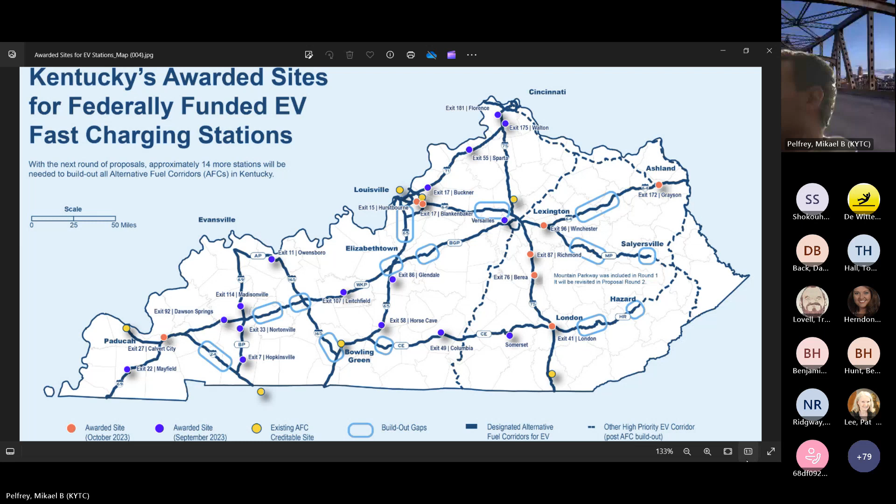That is all I've got this morning. I can't figure out how to stop sharing my screen, but I will turn it back over to Stephen.

Thank you. Yeah, let me know when you figure out Teams. It's only been 3-4 years. I know, but I'm on 2 different devices. Okay.

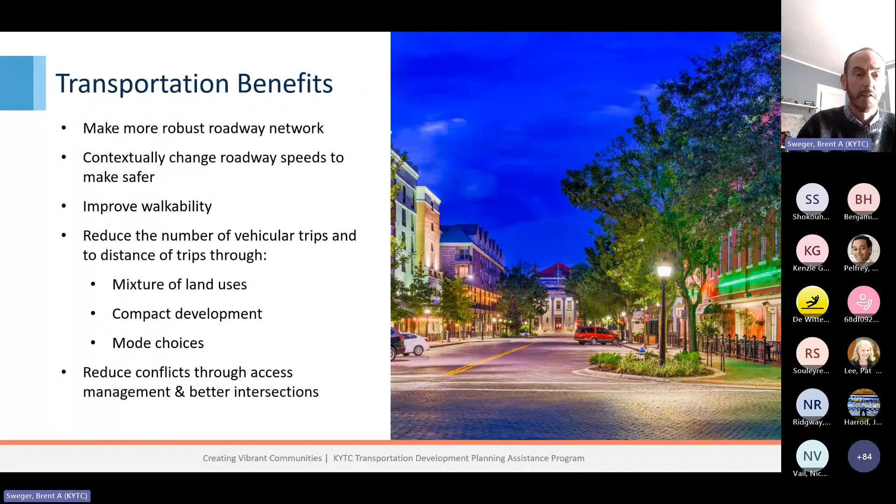Back in October at our STP meeting, that was the week we opened up the application process. I let you all know about the program, and many of you got the word out to your local communities across your area, so I want to thank all of you that did that, those at the district offices, area development districts, and MPOs. We also tried to get the word out broadly through the League of Cities, the Kentucky Main Street program, as well as the APA chapter of Kentucky.

The application process was open for about 2 months, closed on December 11th. Once we closed it, we got the application information sent out to our selection committee. We had 7 people that served on the selection committee, and they spent several weeks reading those applications, evaluating them, and scoring them using metrics to establish those scores.

We went over last time what those measurements were, but it comes down to 70% being about whether it's really meeting the goals we've outlined, and we had a lot more detail in the criteria on our website. Then there's how ready is the project and how ready is the community — is this a one-person show, or are there a lot of people on board and supportive of this effort?

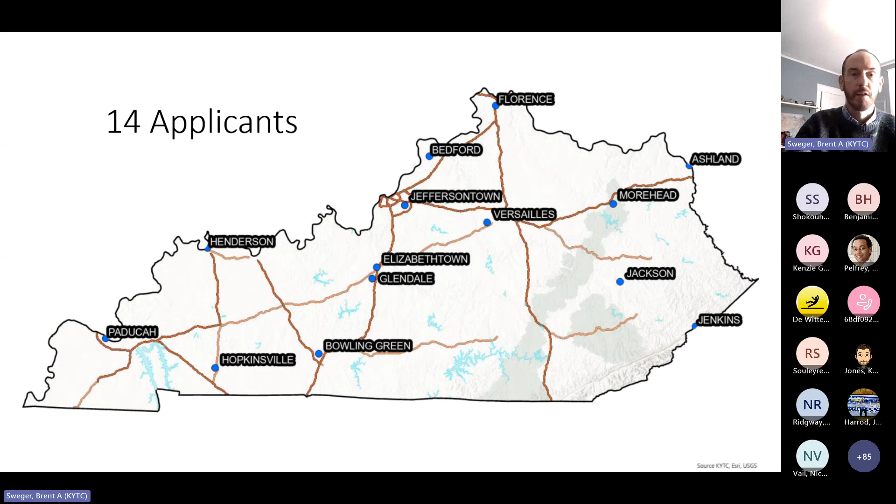But in the end, we were excited to come up with 4 recipients for this time. So let me share those with you right now. The communities are Morehead, Glendale, Elizabethtown, and Jeffersontown.

I'm not going to dive into too much on their specific applications this time. I'm hoping that at a future STP meeting, Nathan, if you're interested in getting more topics, maybe in the summertime we'll be able to share the details of each one of these. But we're excited to get working with each one right away.

For those communities that didn't make it this time around, we're going to send something official to each of them. As part of that, we're going to offer an opportunity to have a debriefing, so if any of them would like to hear about the feedback from the selection committee, both positive or anything that could be improved, we'd be happy to do that.

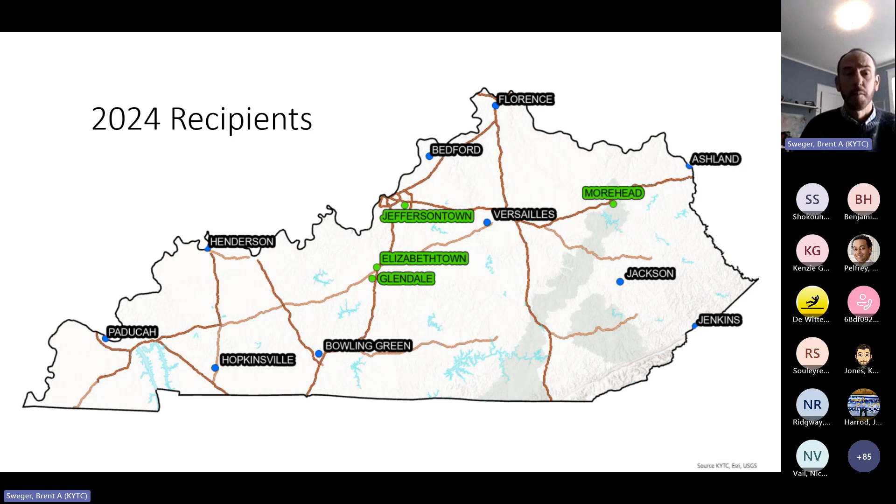So the next steps here, we're actually meeting next week with each of the recipients. We're going to have a scoping meeting to talk about their project a little bit and get into forming that scope for our consultants' work.

The schedule starts in February, we'll have a kickoff, and we're going to be creating an engagement plan for the community. Like all of our planning studies, public involvement and defining the appropriate level of public involvement is a critical piece. So we'll be doing that and looking at the base conditions, what's out there right now in terms of the roadway networks, the existing land uses, et cetera.

Then in the springtime, we'll be doing some visioning exercises and setting some goals and strategies with each of the cities. In late spring and summertime, we'll be getting into the details and forming what some of these concepts are and getting some feedback on that.

Then we're looking to basically wrap it up in the early fall, where we'll create a draft plan, possibly get some feedback on that, and then create that final plan. Then working with each of the cities to adopt them, getting the city or the county to adopt it, as well as planning commissions, and then talking to them about how they can actually move these initiatives forward towards reality.

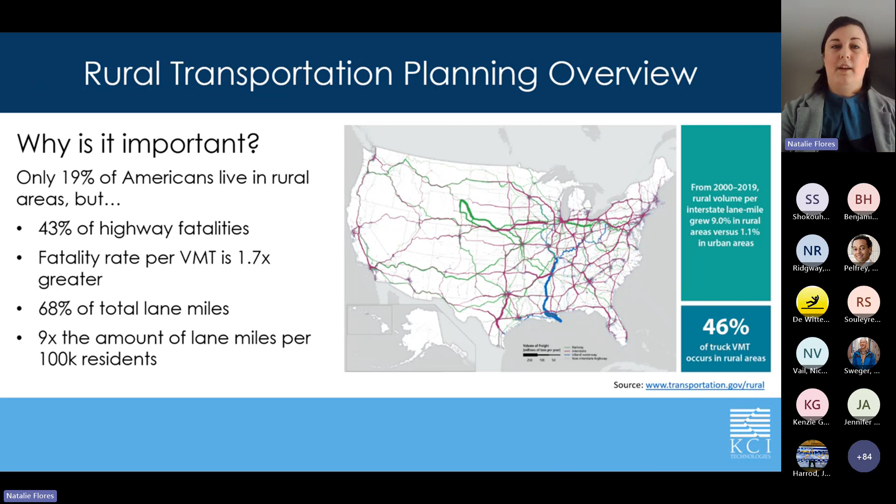Going into our first example, we're going to talk about the Perry County Bicycle and Pedestrian Plan. Perry County is a very small population-wise county in Tennessee, the second lowest in population with about 8,000 residents. It's located along the Tennessee River in Middle Tennessee, but it has a unique set of natural and cultural resources.

In addition, I just mentioned the county itself has a population of 8,000, but Mousetail Landing State Park is a tourism driver in the area, receiving about 250,000 annual visitors. So even though it is a small residential population, it is a very busy tourism destination.

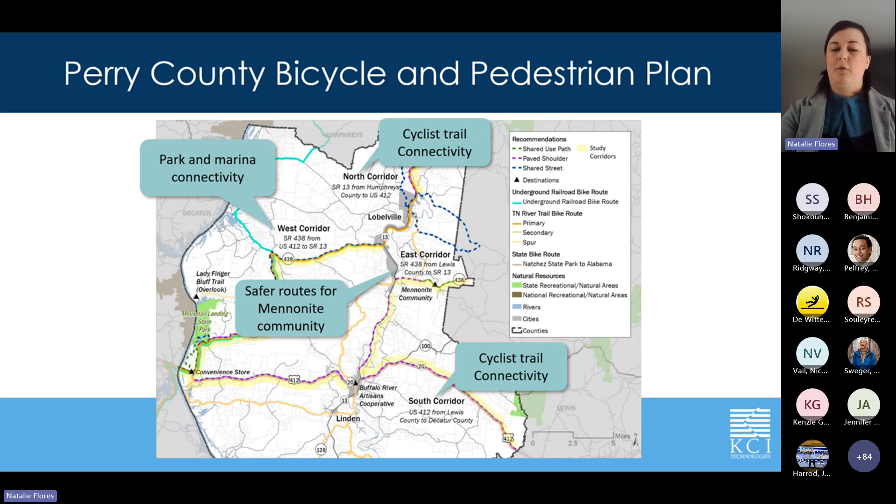Realizing that rural communities sometimes don't have the finances themselves to go after such projects, we want to make sure that whatever does get recommended is matched with a good fit, or potential good fit, for a grant application. These are some of the recommendations and the cross sections for that eastern segment, the Mennonite residential area and community.

You can see that cross section includes a shared use path. Along with the map, you can see the bridge crossings, the steep right of way. There's a Cane Creek access, which should be a trail, a potential trail access right there. There's also a trailhead at Cane Creek Market, and then the Mennonite Church is also in that area.

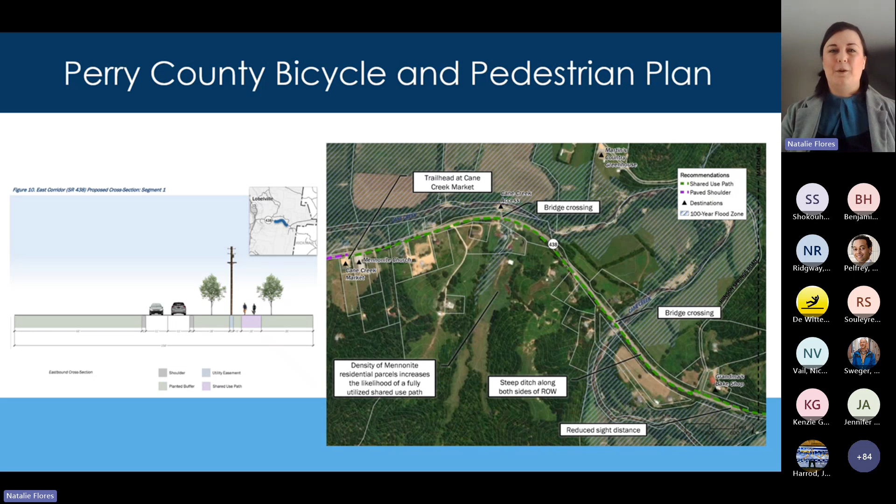We made sure to talk with the community and find out what they needed, and in this section a shared use path made the most sense. If you know an avid cyclist, it's not too much of an ask for them to try out a new trail, even if it's a little detour away. With the proximity to the trails that bisect Perry County, it's expected that once constructed this would also be another resource for tourism and for cyclists coming to Perry County.

Moving on, I'll go to the Sneedville Complete Streets Plan. A little background on Sneedville: it's in Hancock County, which is categorized as economically distressed by the ARC, meaning it's among the top 10% distressed counties in the United States. The population is just over 1,300, and the median household income is nearly half the state average.

Taking this into account, it's really important to make sure every road user has the ability to travel safely. In the pictures, you can see a cyclist on the road with vehicles, and also a motorcycle with a tractor pulling a tanker, all on the same road at the same time. I'm sure you see this a lot in your own communities too, everybody on the road all at once. There's great variety in the types of vehicles that use these roadways, so we want to make sure our most vulnerable road users are protected, especially in this area.

As I'll go into more detail in a moment, there are sidewalk gaps, so people walk in the street or through parking lots. It's an increasingly unsafe area as there is more traffic and more variety of traffic, including these heavy vehicles. A little more about Sneedville: nearly twice as many people commute into Sneedville for work than commute out.

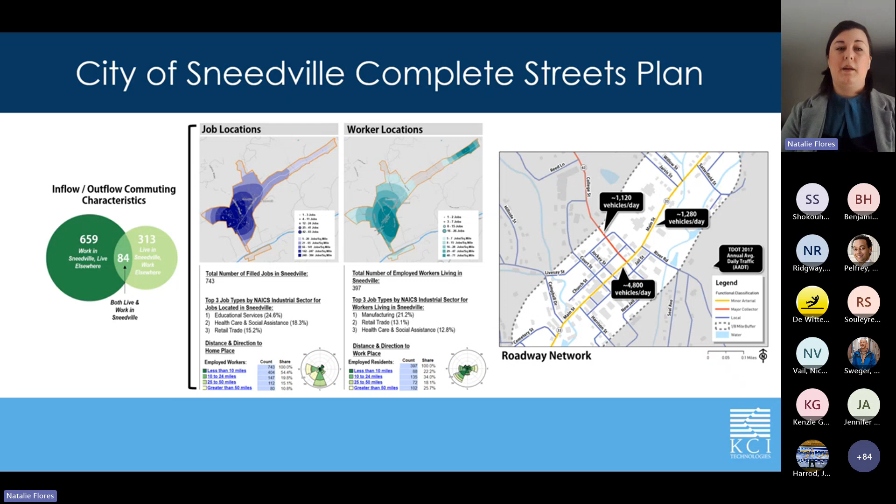Existing conditions, as I mentioned before, include sidewalk gaps, shoulders that blend into business parking, lack of street lighting, and marked crossing locations.

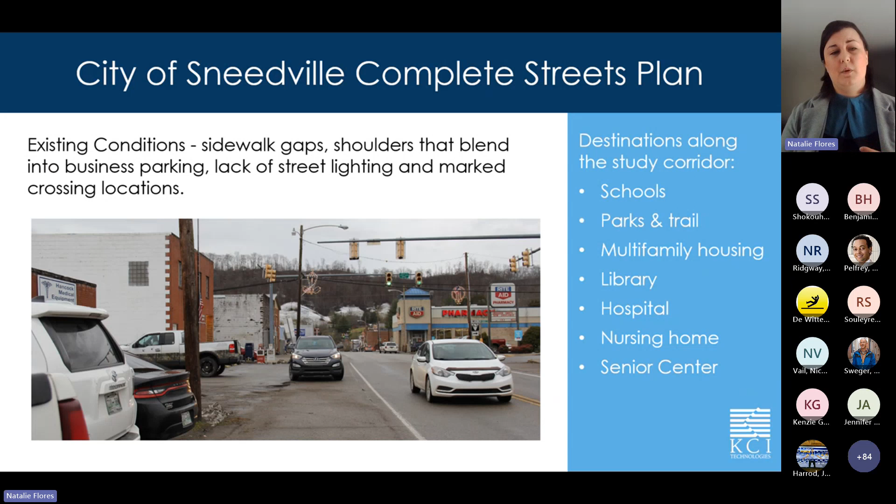There are also multiple destinations along the study corridor that make it highly traveled for a variety of reasons—schools, parks, multifamily low-income housing, a library, hospitals, and others all belong on this corridor. So you can see how higher levels of traffic compared to the rest of Sneedville, a higher percentage of people cycling and walking, sidewalk gaps, and parking where you can't tell where it stops and the shoulder starts, creates a really dangerous situation—not just for vulnerable road users, but also for people using vehicles. We can see that in how the crashes occur.

84 crashes occurred between 2009 and 2019. The crash rate for this corridor is 5.58, while the typical or expected crash rate for a corridor like this is 1.65. So the existing crash rate is many times higher than what would be expected. The study found that frequent conflict points contributed to the high number of crashes.

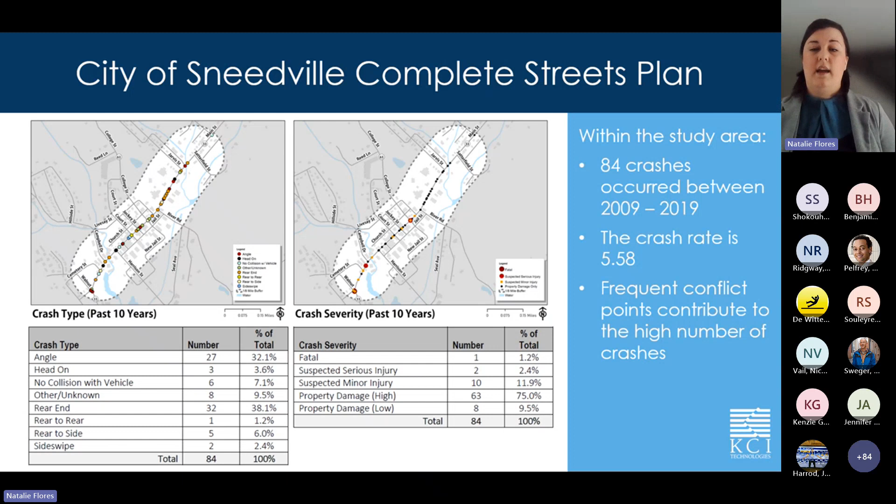Some of the recommendations were for small infrastructure improvements, such as adding more sidewalks and constructing bulb-outs to help space out parking from the driving lane, so people aren't driving where others are trying to park. These were all put into 5 different sections, A through E, which helps break it apart into bite-sized pieces so the community doesn't have to get funding for the entire corridor all at once or prioritize everything simultaneously. It also helps to complete one section as proof of concept, showing the community that this is something they want and would like to continue.

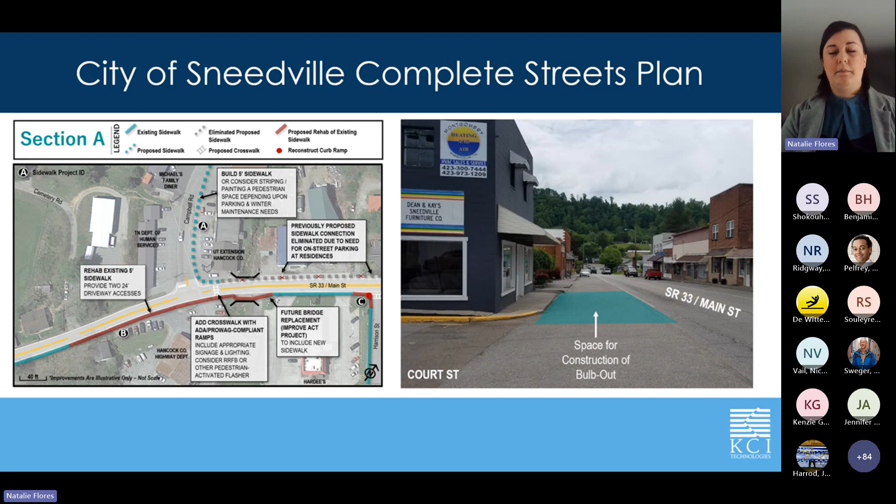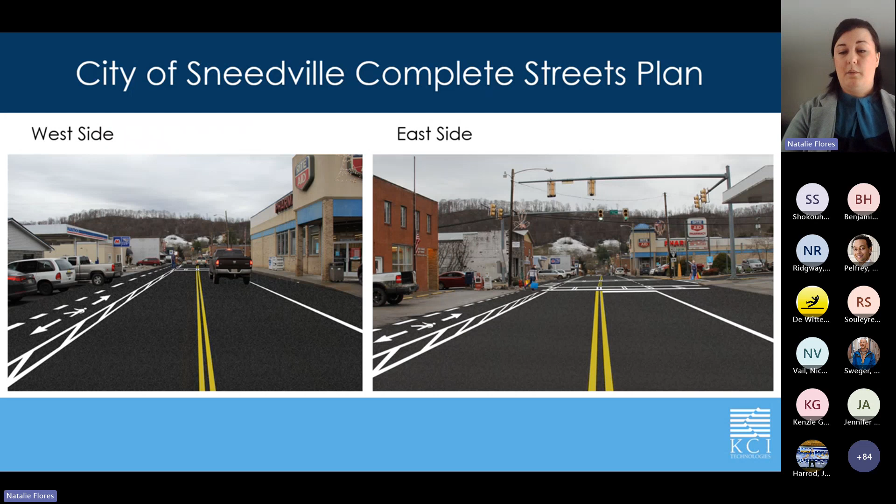However, because of the high volume of traffic, the mixed use of traffic with heavy vehicles plus pedestrians and cyclists, and the extreme need in the community, it was decided to develop models for an interim improvement. This was unique to this project—they modeled interim improvements including a pedestrian lane. One concern with building sidewalks everywhere was that it would block access to buildings that only have street parking, like the brick post office building, where all parking requires street frontage. So for an interim improvement, while more detailed plans were developed for sidewalks and safe pedestrian routing, this approach gave space to people already walking on the roadway without high cost, promoting pedestrian safety while also separating parking from the travel lanes. That was something really different about this project.

It is home to a regional airport, a Walmart distribution center, a justice center, business park, and is also currently being developed. One of the reasons why we were contacted to help with this plan is because they wanted to make sure that Bedford County still retained its rural character while also still trying to get more development and more economic growth.

And this is always the balance. We want to keep the rural community, we love the rural community, we love the rural character, we also want to keep growing. How do we balance the two, or how can we encourage more development while protecting the rural nature?

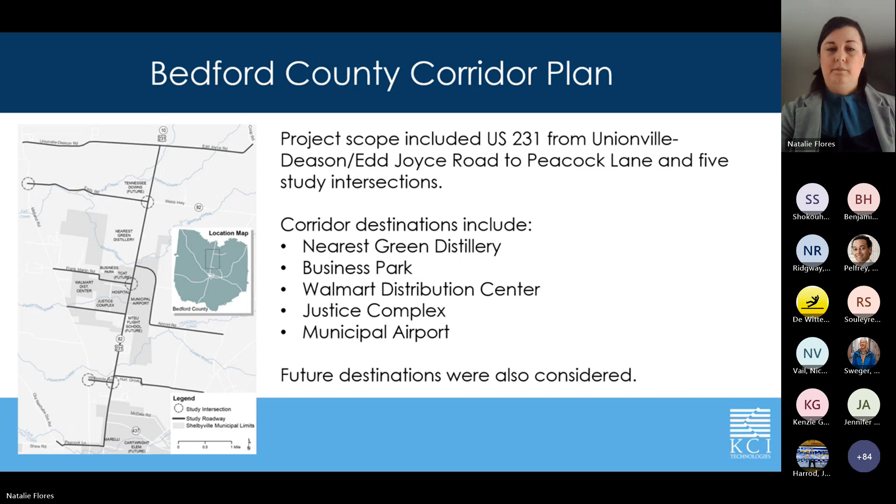With those developments and those planned developments, along with annual daily traffic and annual average daily traffic counts we did for the study, we took that into account and made a projected level of service that helps us narrow down our recommendations. We also looked at crashes by severity type to see where the problem areas were in this corridor.

Again, it is highly trafficked by commuters. This corridor, US 231, is used to go from Shelbyville to Murfreesboro, but is also along a network of roads that leads to Nashville. So it's highly trafficked for people going into Nashville or coming back home, but then also people work right here in this area. Bedford County has a population of about 50,000 residents, and you're looking at average traffic about half that on this corridor.

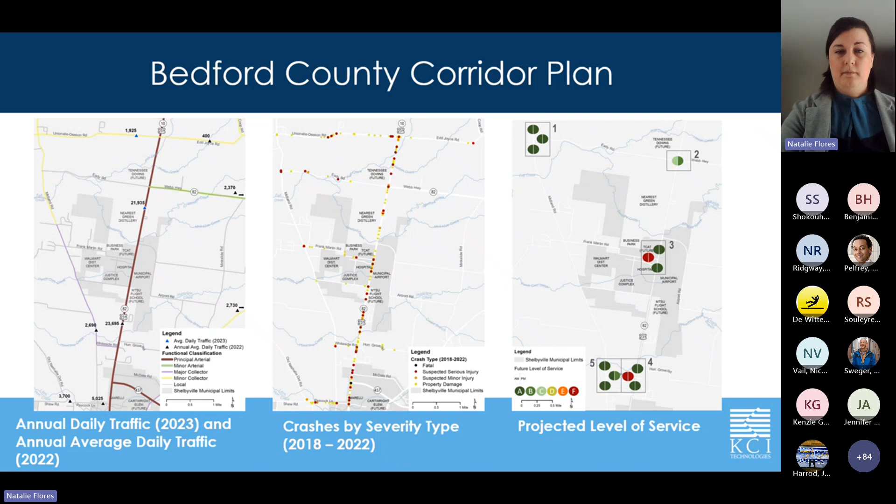With all this information, and I know it's been a lot, 11 infrastructure improvements were recommended. We also did recommendations that were non-infrastructure. Again, with tourism, the Nearest Green Distillery and the Tennessee Downs expecting to have events in the future, we realized the need for some corridor and management agreements, so they could better plan those events and make sure they didn't have an exacerbated traffic problem.

One of the more unique aspects of this plan was the proposed multi-use path. I mentioned before that they wanted to really keep the rural environment, and this multi-use path was seen as a way for residents and commuters to get to their destination without having to use a vehicle, and for people coming in as tourists to travel between tourist destinations that are sometimes less than a mile apart without getting into their vehicle.

But it was also seen as a way to promote development and infill development south of the study's northern terminus, and protect what was north of that from development, by saying we are building this here, and so promoting development where there is infrastructure. You want your tourism development, residential development, and other developments to be where there's infrastructure like this, so people don't have to get into a car if they don't want to.

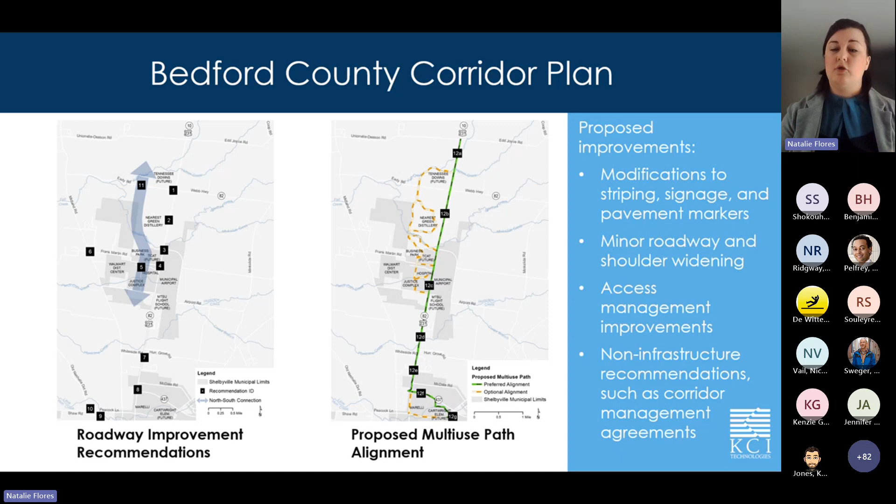So these are some illustrations that were made for that multi-use path. We have two examples, one of it without being on US 231, and one of it being beside US 231.

And before I continue on, because I'm almost done, I just want to wrap it up and say, again, this is not all-encompassing of rural planning or semi-rural planning, but it does show how every community is different, every need is different. Rural communities aren't a monolith.

We've seen just in these three plans a multi-use path being used to promote infill and reduce development where they want to keep a rural character. We've seen a main street that looks nothing like any main street you've seen. And we've seen interim improvements that really aren't seen very much elsewhere in planning.

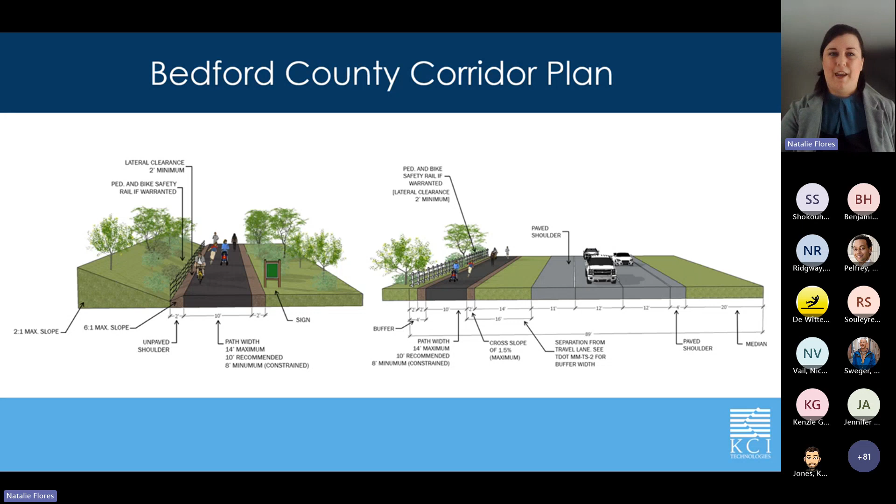So it really helps to come in with optimism and a really innovative, forward-thinking mindset where you can say, whatever the problem is, I'm going to come into it and not prescribe the solution before I hear from the community about that. So with that, before we go into community resources, I'll open it up for questions and comments.

Hi, Natalie, this is Cassandra Cruikshank with KYTC DEA. Hi, how are you? I'm well, thank you for your presentation. I have kind of a niche question. I run the pollinator initiative for KYTC, and I was curious if you guys had integrated pollinator plots in some of your border areas, and if not, if that's something you all would be interested in doing.

That is something that we would be interested in doing. We really look at some of our green areas more as watersheds, or as a way to help with stormwater. But we could definitely think about pollination or pollinators in addition to that. Thank you so much for your comment. No problem, thank you. Maybe I'll get in contact with you after this. Sure, thank you.

This is Bernadette. I think you mentioned it, but I didn't get it right. How long was your multi-use path? Oh, our multi-use path, I believe it was around a 2-mile stretch of corridor. It would have run along that stretch. I think it was between 1.5 and 2 miles, but if you send me an email, I can get you the exact number. Thank you.

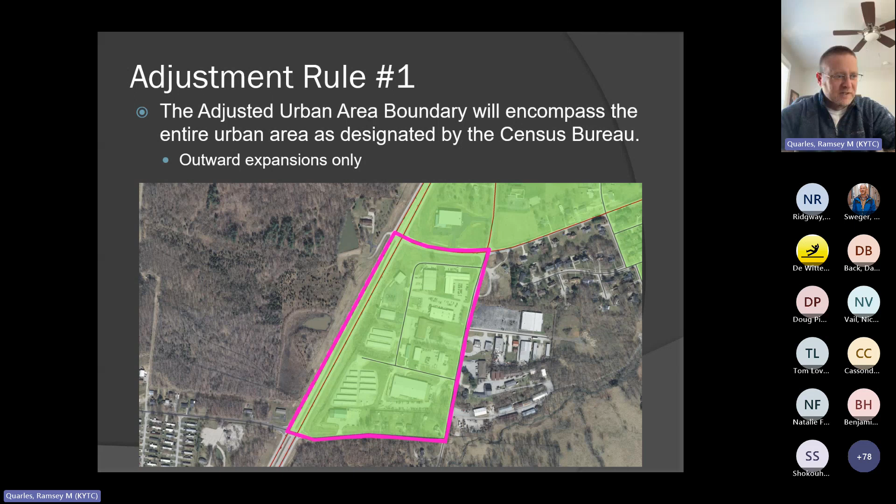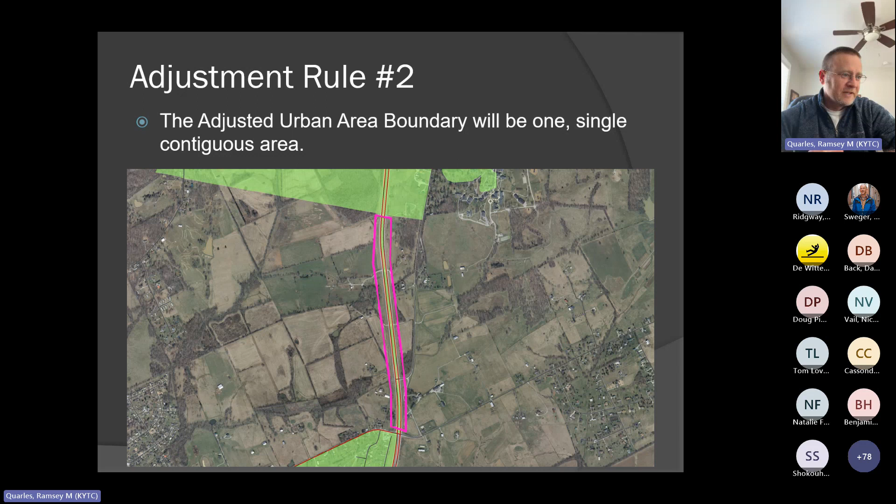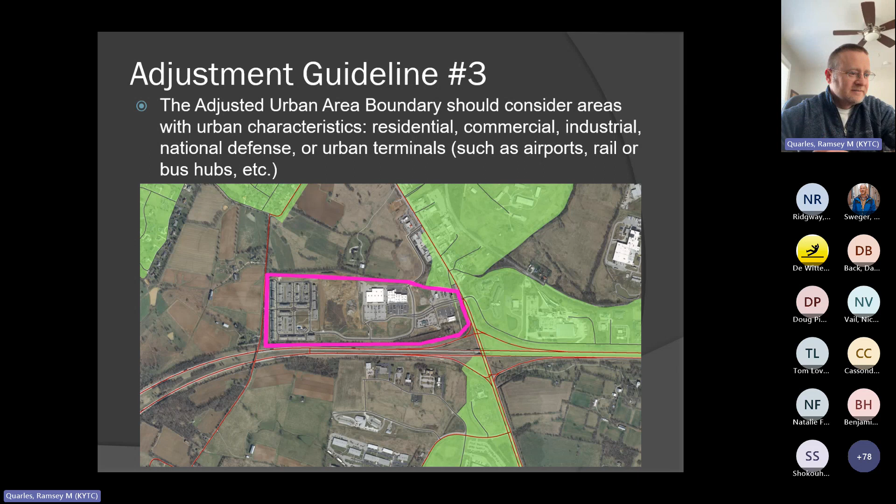You can look at this picture and see how irregular the green is. That's the census boundary before we even got started with this one. Just very irregular.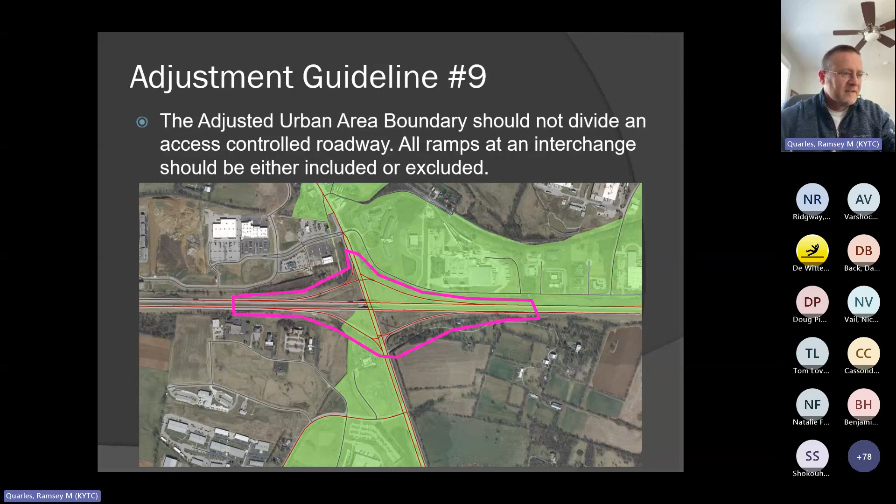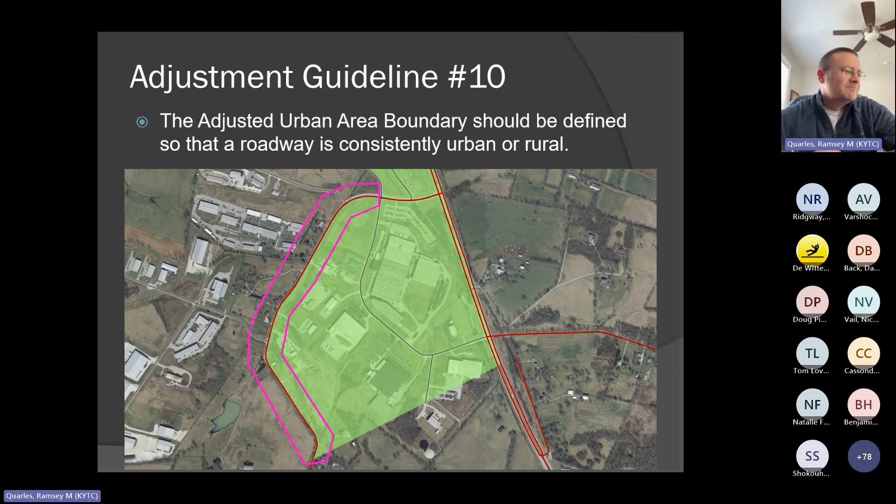When we're doing our functional class review, which is what would be done next once this is approved, we would go back and change all the rural and urban functional class designations, and also do a statewide review of functional class. In this case, you wouldn't want this first part to be urban and the last part to be rural - because it's bordering the boundary, you'd want all of that to be urban or rural. You kind of don't want to break it up like that. I think that's my presentation.

This was kind of a difficult presentation because it's more of something I've always done for local officials, kind of telling them how to do it, which is kind of the way this presentation went. But if there's any questions, please let me know.

Hey Ramsey, we got a question in the chat from David Silverette. Can you split urban areas into different labeled areas? On a related note, can you create urban areas that are back to back, or is there a required buffer zone? You broke up on that last part of the question - you said, or is there a required buffer zone?

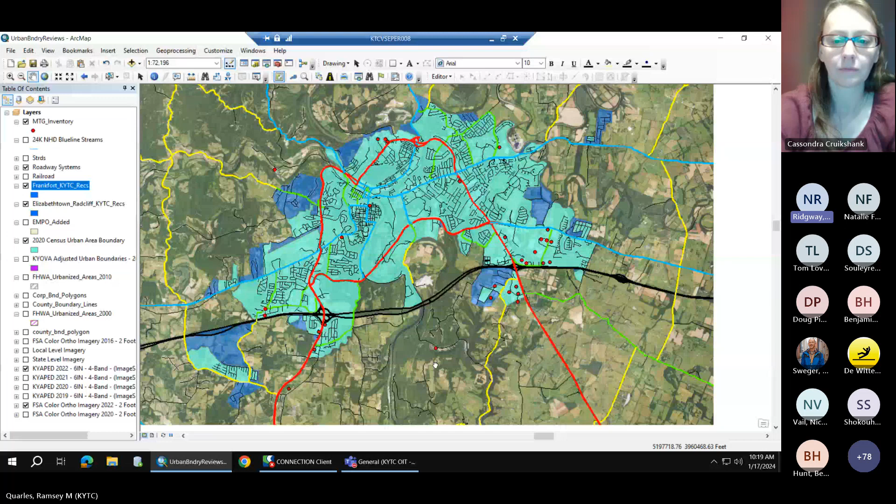Cassondra Cruikshank is an environmental biologist at KYTC with the Division of Environmental Analysis. She will be presenting about KYTC's wildlife crossing study, which looks to determine stressors surrounding wildlife vehicle collisions and the intention of installing wildlife crossings at multiple points across Kentucky. Thank you, Cassondra.

Thank you very much. My name is Cassondra Cruikshank, and I have been helping out with the wildlife crossings. First of all, can you all hear me all right? Yes ma'am. Yes. All right, wonderful. I'm at home today with 2 little ones, so we're working with what we got.

So I am helping out with our wildlife crossings initiative. First and foremost, I want to give credit where credit is due - this presentation today and most of the effort has been done by Andrew Logsdon, our ecology and permitting branch manager. He has really spearheaded this effort. This effort was first brought to DEA from up on high on the 6th floor. It was an initiative that has been gaining traction and interest that they would like KYTC to start addressing. So I wanted to share some information on wildlife crossings today, but also on what KYTC is doing with those initiatives.

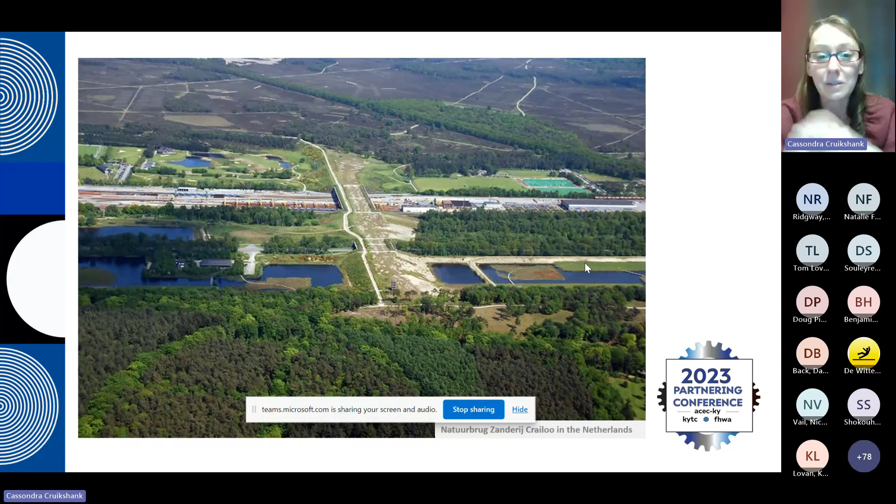They can span over entire 8-lane highways. They can be as large as we want them to be, within reason for funding's sake. But the idea of a large, very elaborate wildlife crossing that can facilitate multiple species is definitely an idea that is being utilized and is being successful.

Some of the wildlife crossings that we're noting as being extremely successful include Banff National Park in Alberta, Canada. There are 44 structures - 6 bridges, 38 underpasses - built for wildlife to traverse the Trans-Canada Highway, the nation's longest road, which bisects the park. Not an ideal location for a very long road in your park, but in order to augment that, wildlife crossings were created. Since its construction, they have documented more than 150,000 wildlife crossings by a great variety of larger fauna - elk, moose, black bears, cougar, grizzly bears - and an untold number of smaller animals that are harder to detect.

One of the things that really benefited from this particular wildlife crossing: a few years ago, studies indicated that grizzly bears in particular were actually losing a lot of their genetic diversity. It was causing a lot of inbreeding issues and a lack of population growth. But in this particular area, the wildlife crossing actually helped to stabilize that genetic flow. This is one of the places that contributed to an 80% reduction in motor accidents and wildlife strikes. So they can be very effective, and they can work really well for health and human safety and for a more stable ecosystem.

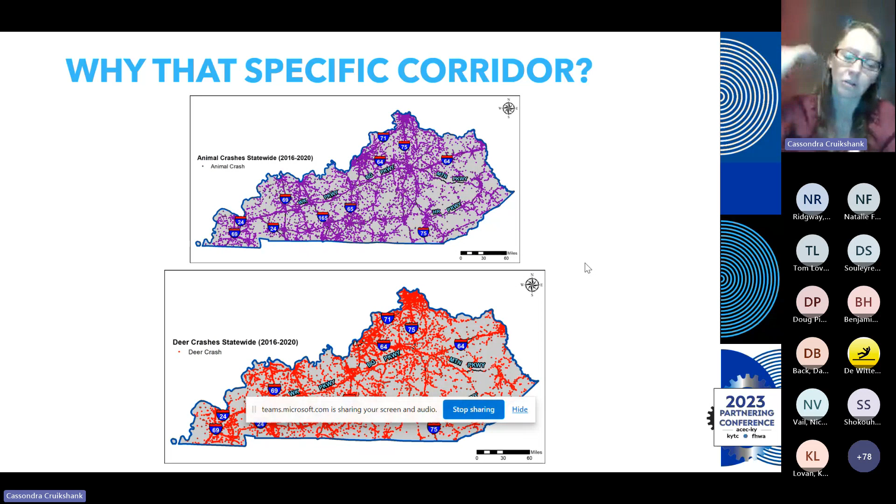Kentucky is just one of those states where almost every major road is a solid red line. This is definitely something wildlife crossings could alleviate, as long as we install them properly, do our homework, and make this statewide study as elaborate as we possibly can.

So who are we going to work with? We have a strategic partnership with the Kentucky Department of Fish and Wildlife Resources. They were one of the first people we reached out to because they have data on elk and deer herd movements, breeding season data, and all the data on animal locations and how they move. We really want to partner with knowledgeable people who can help us understand where these animals are moving and why.

Some of our supporting agencies, including NGOs, are the U.S. Fish and Wildlife Service Kentucky Field Office, along with the American Farmland Trust, Nature Conservancy, and Kentucky Sportsman Caucus, just to name a few.

One state we're looking to as an example for setting up our wildlife crossings and statewide studies is Virginia. They're about 5 to 7 years ahead of us and have reached out to assist Kentucky in a state-by-state effort. They've completed a successful wildlife vehicle collision plan and are moving into the planning and construction phase soon. Since they're ahead of us, we can watch what they build, look at the data they collect, see what worked and what didn't, and hopefully have a more successful construction phase when we move into our own.

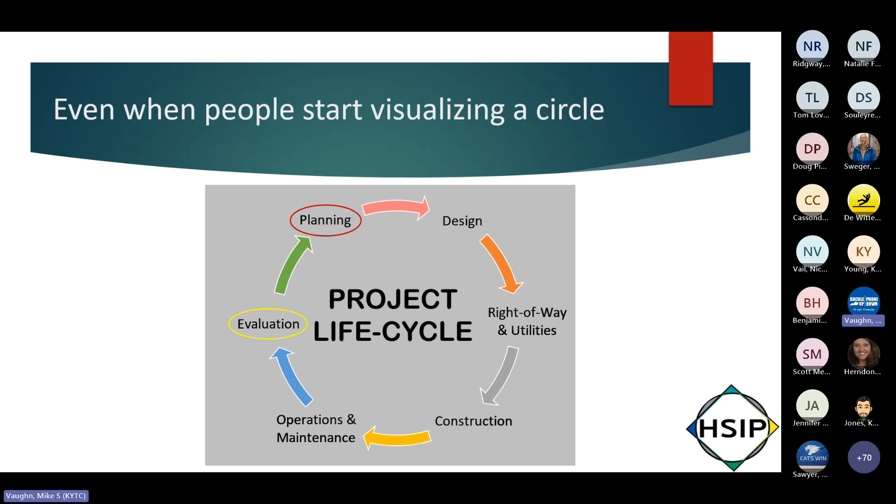But one difference that I perceive, and I could be wrong about this, is that a lot of people, when they visualize the circular project life cycle, actually visualize it differently. You might be thinking, well, what was different? It's the location of where people place planning and evaluation on the circular version of the project lifecycle graphic. Again, I think a lot of people think of planning as the start and evaluation as the end, and we read from top left to right and top to bottom, so I think subconsciously we put planning where we perceive the start of this circle.

I like to think of it like this: that evaluation is where we should be starting. What has worked in the past, what has not worked in the past, and then start planning and designing and moving through the project life cycle. But just a little background on why I think evaluation is such a critical part of the project life cycle.

As the title would suggest, I'm going to talk about some of the evaluations of a couple of our recent major safety initiatives within the HSIP. First up will be our roadway departure corridors - I'll talk about what those are, the types of countermeasures we deploy, and some of the evaluation results. Then I'll move into our restricted crossing U-turn intersections. A lot of you all have probably heard the term R-cut over the last few years, so I'll talk about what R-cuts are, how they operate, and get a little bit into how they help drivers, because they are a little bit of a counterintuitive intersection design.

But then finish up with those evaluation results as well. So let's just jump right into what an RD corridor is. The target facility type for this initiative is rural 2-lane roadways that have a posted speed limit of 50 miles per hour or greater. Obviously, as the name would suggest, our target crash type is roadway departure. This does not necessarily mean that it's only single vehicle head-on and side swipe opposite direction crashes. There are occasionally other oddball crash types that do technically classify as roadway departure, but these three crash types make up the lion's share of roadway departure crashes.

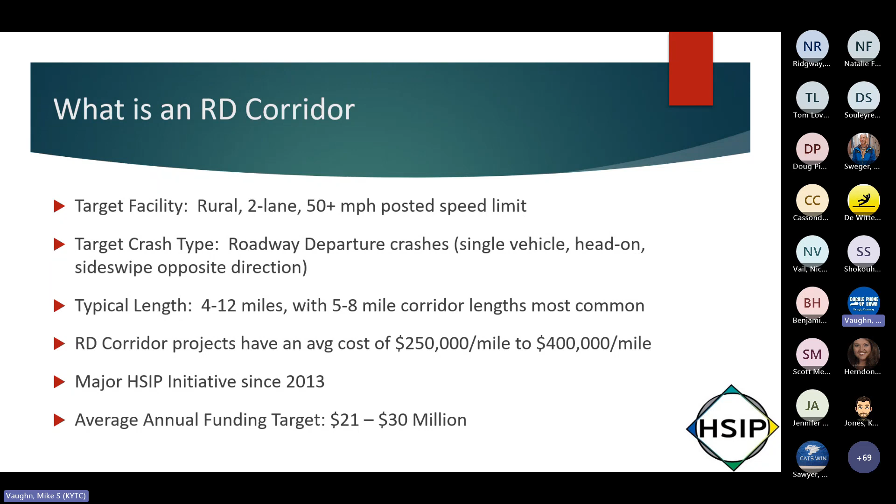Some of the improvements we make: we widen or pave shoulders. What we're looking to maximize, the most we would likely widen to is about 26 feet of total pavement to give us 11-foot lanes and 2-foot paved shoulders. At 25 feet, we're able to add centerline and edgeline rumble strips, and we view those as the primo roadway departure countermeasure. Once we're able to get enough width for those types of rumble strips, we don't necessarily see for our program that additional investment and additional width give us commensurate returns on investment. So we tend to cap our widening to this type of cross section.

That said, we don't necessarily do a lot of pavement widening with these projects. A lot of y'all are familiar with our rural 2-lane roadways, and a lot of times there's very challenging roadside as soon as you leave the edge of pavement. This second item, roadside regrading, is probably the most common countermeasure we implement with these corridor projects. That goes hand in glove with culvert pipe extensions and installation of more crash-worthy headwalls. A lot of these older roads have the old standard headwall that creates a pretty significant snag opportunity. So we invest quite a bit in roadside regrading and pipe extensions.

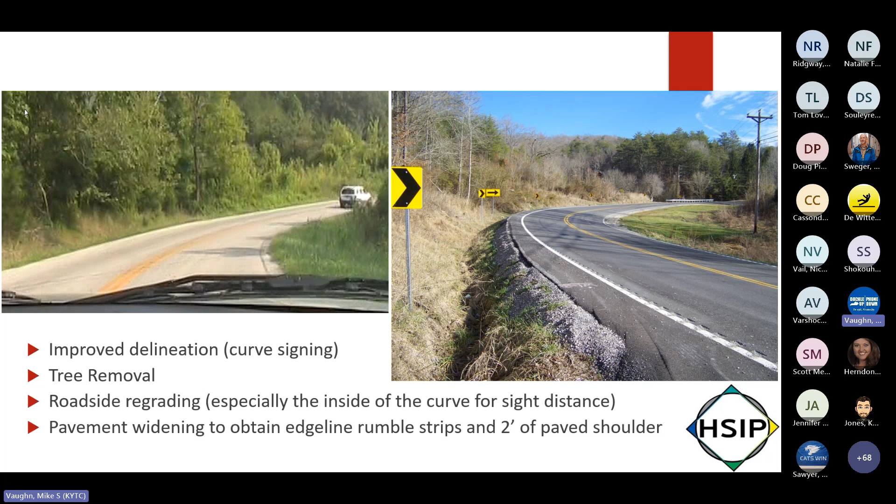So here's a few photos of some of these, before and after, some just the after. Here's a project where we did some strategic widening, got a little bit wider lane, some paved shoulders, some edgeline rumble strips. Obviously had to regrade the roadside. Didn't do a lot on the outside of this curve. Most of the roadside regrading that's more notable is on the inside to open up the sight line. You can see we've also removed some trees and added some signing.

Here's a spot-specific example along a corridor where we had a pretty deep hole that led into a cross drain very near the edge of pavement. We took the headwall off, put in a drop box, regraded the roadside to get the flow into this new drop box to work, and did a little bit of pavement widening through here to get us some edgeline rumble strips and about 1 foot of paved shoulder.

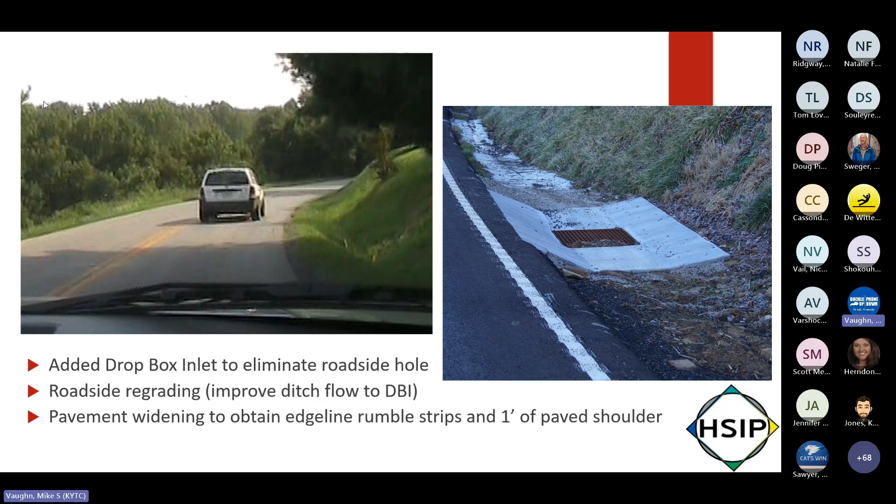Here's another one, a little bit more extensive roadside regrading. Again, you can see we kept it within the right-of-way. This would have been a road where we were following the KRS statutory presumed right-of-way, going by utility poles and fence lines, but we improved the roadside as much as we could up to that existing fence line, added a DGA wedge to help with any future drop-offs that may exist, and a little bit of strategic widening here as well.

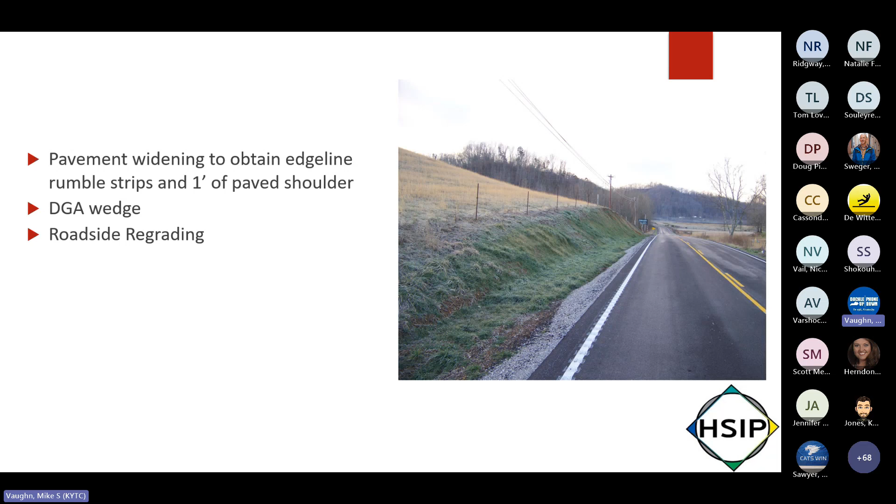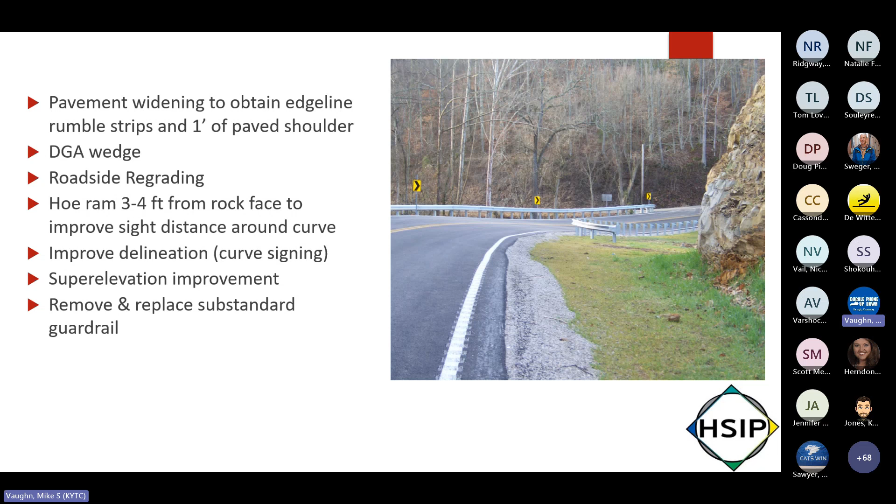Here's one where we did a lot. There was some super elevation improvement, maybe even some strategic curve widening, or we were trying to widen more of the corridor - my recollection is this was a little bit more of a strategic pavement widening through this challenging curve. Some DGA wedge, roadside regrading. Unique here though, we did hoe ram about 3 to 4 feet off the rock face to help with some of the sight distance. Didn't necessarily get complete sight distance, but we did what we could with the right-of-way we had. Also some signing work, and then remove and replace the guardrail out there.

So these next few slides, I want to talk a little bit about what I mean by some of our targeted guardrail in treatment.

Right out the gate, if there's just no end treatment, it's a spearing hazard. Clearly, we have to target those. I mean, that's just such a risk to drivers.

Kind of next up is the type 7, the old turn down end treatment. Those don't always perform well when they get hit.

Another one that's similar to the type 7, it's different, but is what we call our dipping type 3. It's how we installed the type 3 end treatment before we switched up the standard drawings to include the pipe and the ditch line, filling that in with embankment and keeping the guardrail height at the proper height throughout the taper into the back slope. Before that, they kind of dipped, and I've got some photos.

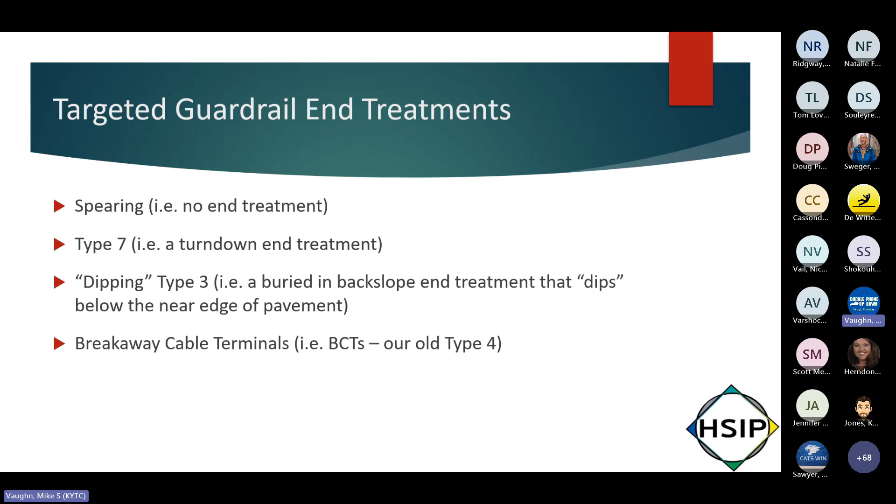And then the last one we target is the old breakaway cable terminal. It's the type 4 end treatment before the type 4A came along.

Here's a type 7. There's actually two versions of the type 7, the strong post and weak post. This one's the strong post. It can definitely launch a vehicle, especially small and light vehicles, when they hit this.

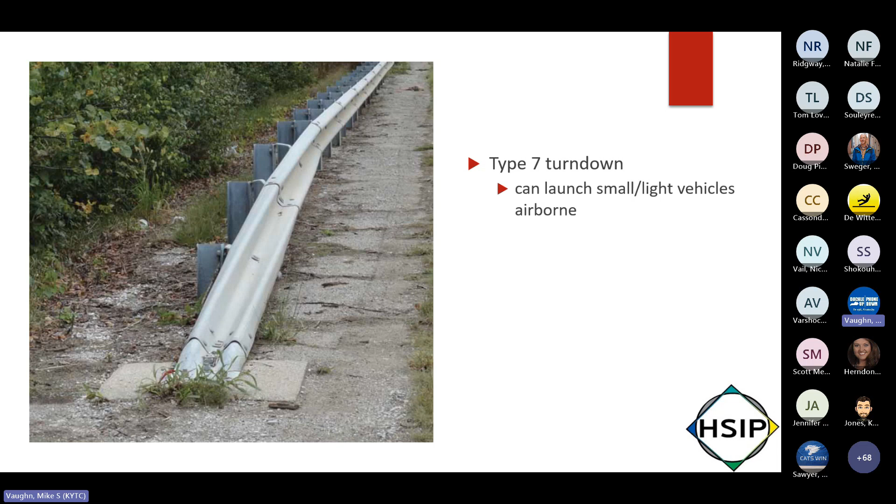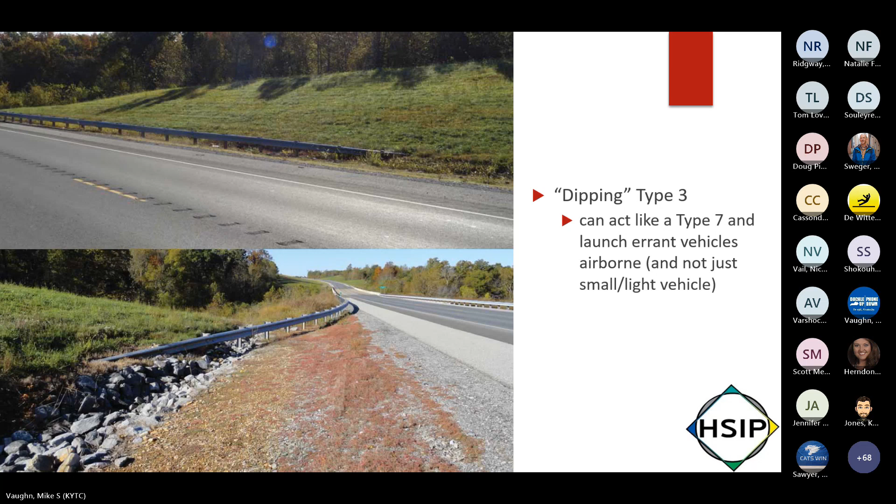So we try to target these and put in the current standard drawing of the type 3 so that the elevation of the guardrail is consistent with the pavement edge.

The last one is the breakaway cable terminal. A lot of people call these the BCTs. Again, this is what our type 4 used to be before the 4A came along. These can be a little tough for folks to identify, but there's a few telltale signs. A little easier to recognize once you get the hang of it is the first 2 posts are wooden. They're breakaway, so they've usually got a hole drilled 2 to 4 inches above grade. But those 2 wooden posts are set in concrete.

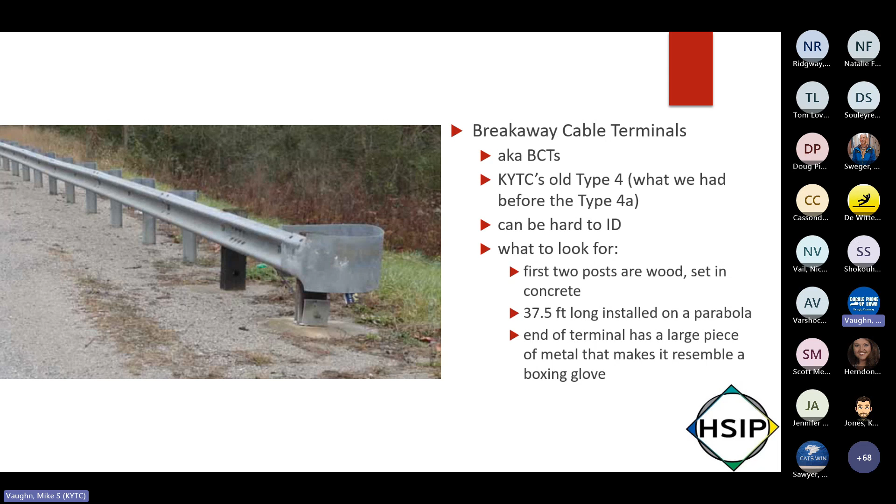This end treatment, 37.5 foot long, is typically installed on a parabola, so that kind of helps them stand out. Another feature is the very end of the end treatment has a pretty large piece of metal that wraps around it, and it makes it look like a boxing glove. Big old ugly end to it, so that sort of makes them stick out.

So jumping into some of our evaluation results here.

Since 2013, we have let—at this point I should have counted this up the last couple of days—I'm pretty sure we've let over 100 of these projects, but we have 42 of them that we've evaluated because they have at least 3 years of after data. A lot of them have 5 years or more. We just tend to cap at 5 years after it was constructed to keep the analysis a little simpler.

But the point with these numbers here is to show it's not 42 based on just 3 years of data. A lion's share of these have 5 years, and a pretty good number have 4 years of after data too. So I think the results you're going to see have a little more meaning because we have a lot of after years in these results.

So of these 42, we only had 1 project that actually saw an increase in fatal and injury crashes. And you're going to hear me talk about fatal and injury quite a bit over these next couple of slides about this initiative, and I do mean all injury. I have a few where I talk about fatal and serious injury. And when it comes to severity, the first 2 crash types we're most worried about are fatal and serious injury.

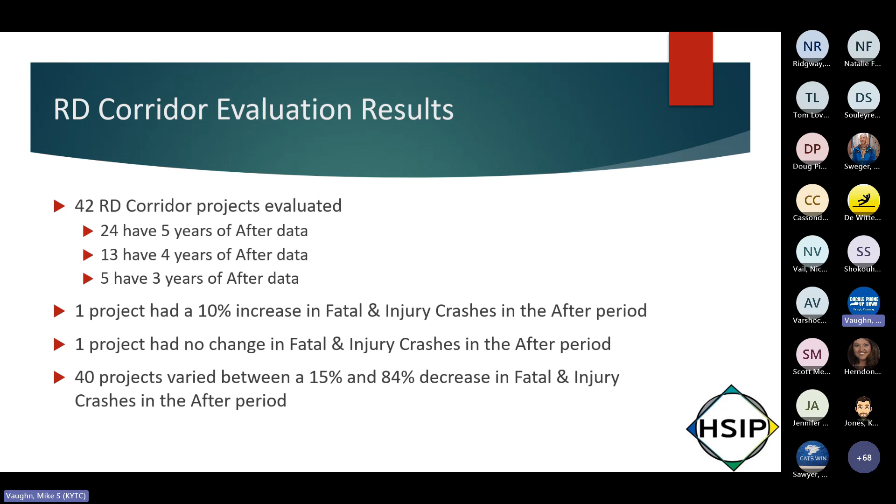If we look at the entire initiative, what we're seeing is an average decrease of 52% of those fatal and injury crashes. Pretty significant number there, especially considering that we're averaging somewhere between 250,000 to 400,000 per mile on project cost. We don't necessarily worry too much about property damage only crashes, but we're also seeing a 39% decrease in those. So that also is a good sign that the improvements we're doing is just helping everybody.

If we start looking more specifically at the fatal and serious injury crashes, what I did here is I had the annual average in the before period and the annual average in the after period, and just summed those up for all 42 corridors. On a per year basis, those 42 corridors were averaging 10.4 fatal crashes in the before period, and in the after we're averaging 6. That's a decrease of 42% in fatal crashes. Not as high as the 52%, but still 42%, that's a big win for us.

The serious injuries had a little bit higher percent reduction there at 54%. And you can see as an entire group of 42, we were averaging 41. So you could almost think of that as every corridor was having a serious injury every year, and we've cut that number by more than half. So we're very happy with these results we've been getting.

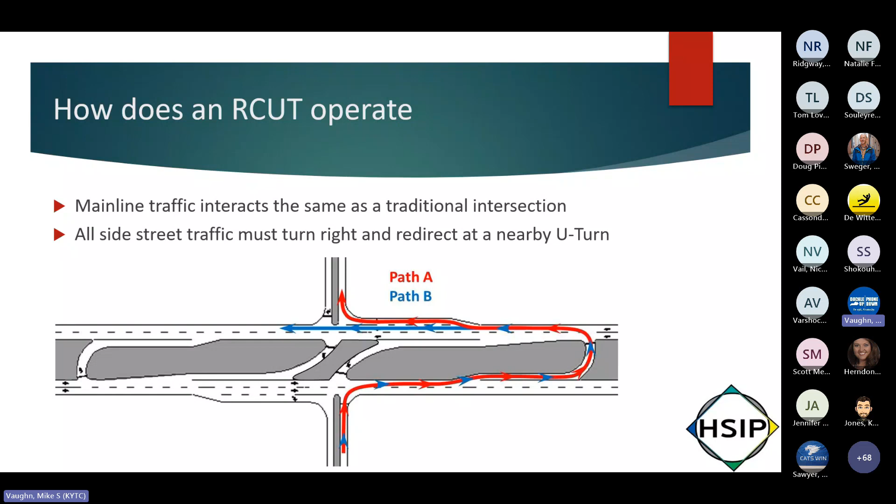The median in the middle of the main intersection is constructed such that it forces all side street traffic to first turn right. If you're just wanting to go right, you just turn right and go. But if you want to go straight across or make a left-hand turn on the mainline, you'll turn right, go a short distance to a nearby U-turn, take the U-turn, and redirect to your desired movement. So in a way it's simple, but it's counterintuitive how this could help.

So let's talk about how R-cuts help drivers. If you look at the number of conflict points at a traditional intersection, there's 32, while at an R-cut there's only 14. So about 56% fewer conflict points. And the way I think about that is fewer conflict points means lower driver workload.

If you're not familiar with what a conflict point is, that's essentially where two vehicles' paths cross, and if one or both vehicles make a mistake, it could lead to a collision. You can see in the upper right the diagram for the 32 conflict points at a traditional intersection. The red dots are the crossing conflict points, where we could experience a T-bone crash, an angle crash, or a left turn related crash that tends to produce very severe crash severities.

In the bottom right, we've got the R-cut conflict point diagram. You can see much fewer conflict points. The big feature is there's only 2 crossing conflict points at the R-cut, so a lot less opportunity for folks to get involved in those more severe angle and left turn related crashes.

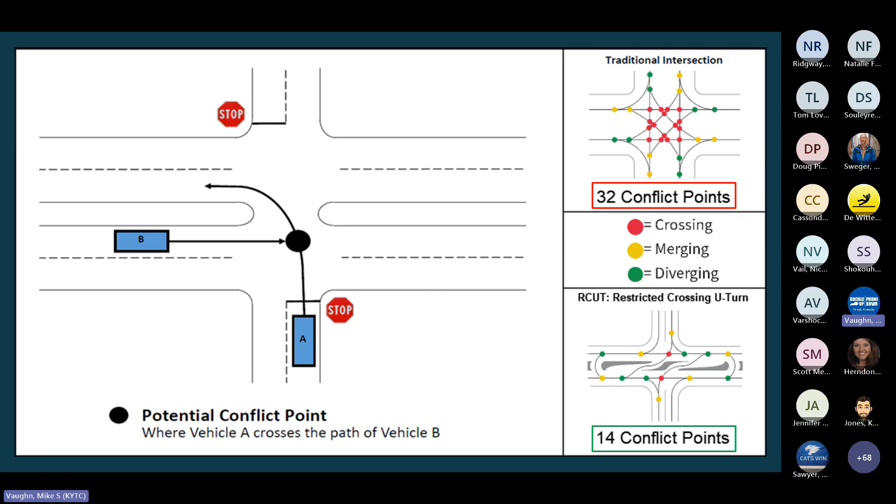I talked a couple slides ago about fewer conflict points meaning less driver workload. I've got a little video here that can help illustrate what I mean by that and how fewer conflict points help drivers. So I'm going to play this.

On a busy road, drivers have to monitor conflict points from all directions. Too many conflict points can make that task unpredictable and risky. But designs that reduce conflict points make the environment more predictable and a less stressful experience.

And a stressed out driver is more likely to make a poor decision. So that's really what I mean by lower driver workload. It's just a much more comfortable environment to interact with, and drivers tend to be a little more successful.

All right, let's jump into some of the evaluation results on our R-cut. Not as many projects to evaluate, and not as many years, but we do have 15 that we've looked at. A little less than half have only 2 years of after data, which isn't ideal, but we've elected to begin evaluating at a younger age because we've seen very, very consistent beneficial results with these R-cuts.

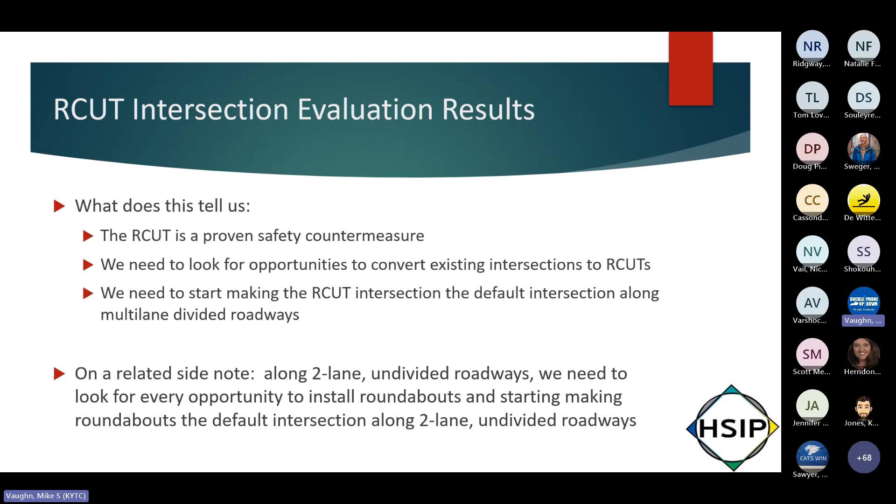So I think the 1-2 punch of roundabout and RCUT could make for very, very impressive improvements across our state. So that is it. If there's any questions, be happy to take those.

Yeah Mike, we got a couple in the chat. First, I think Keith Lovin brought up, have you done an evaluation looking at bike and ped crashes? Reginald Souleyrette and Jason Swallow both provided some other analysis for vulnerable road users that were added to the strategic highway safety plan. And Jason also mentioned about local road safety plans. That's something we could bring you back in for another STP meeting about to discuss. I know you were involved with some of the local road plans as well. It's something we can bring about.